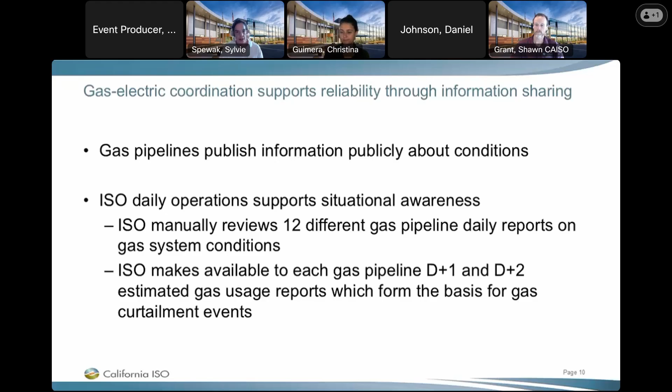Market participant expected behavior in response to physical limitations. Under normal conditions, resources are expected to notify the ISO of fuel supply concerns by submitting an outage card to the extent that fuel is unavailable or a derate for insufficient fuel supply. For outages, the ISO's policy is that once these outages are made public by the gas company, generators are responsible for submitting the plant level limitation through the outage management system so that we can reflect that in the market.

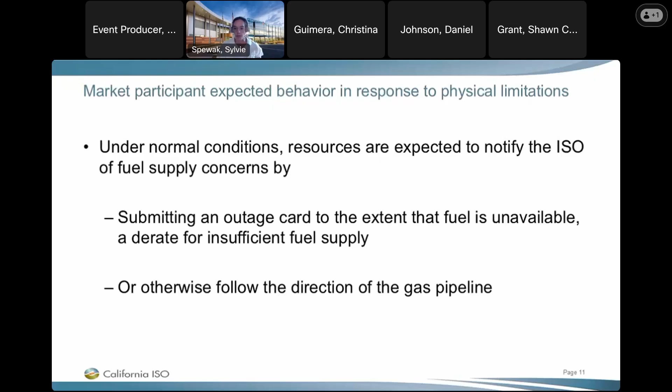There could be conditions that are not considered normal conditions, or as otherwise defined by the gas pipeline, where we might follow procedure at the direction of the gas pipeline. Gas-electric coordination is also integral to establishing capabilities necessary to maintain reliability. So this might be under conditions not considered normal conditions. What actions are appropriate in reliability events may be a function of coordination and defined procedure between relevant entities like the gas pipeline, the BA, the reliability coordinator, and the ISO.

So this group of entities might come up with a procedure to define physical gas limitations like service disruptions or curtailments due to reduced gas pressure, pipeline breaks, loss of equipment, or natural disasters. And depending on the circumstances, the ISO may follow a response plan defined in the operating procedure. And I wanted to point this out because we've heard a lot of stakeholder feedback around defining rules to provide more flexibility during operating emergencies like cold weather conditions or extreme weather conditions. So I wanted to point out that we have gas-electric coordination efforts that are intended to define procedure in those conditions.

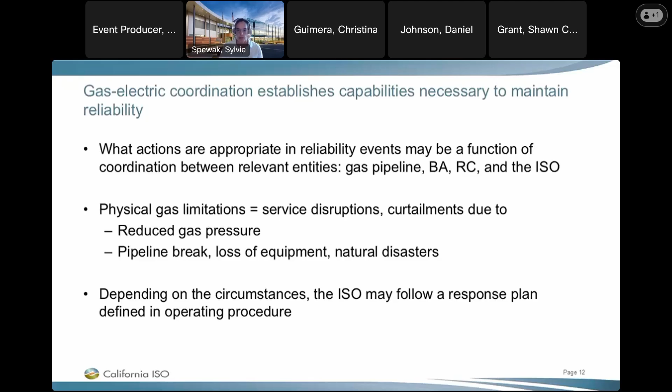All right, expected behavior in response to gas pipeline instructions for managing gas system imbalances. We understand that limitations on imbalances do not necessarily indicate that there's a physical limit on available fuel supply. In fact, not all OFOs are made equal is something that I've heard. They may mean different things for different pipelines.

But the basic definition here is that imbalances might arise when scheduled nominations differ from actual gas usage. So our expected behavior in OFO conditions might depend on when the notification is issued, either day ahead during the next day gas day versus the same day gas cycles, or depending on a resource's specific situation: how far their imbalances are outside of their existing nominations, what their balancing agreements with the pipeline might look like, or access to alternative fuel sources.

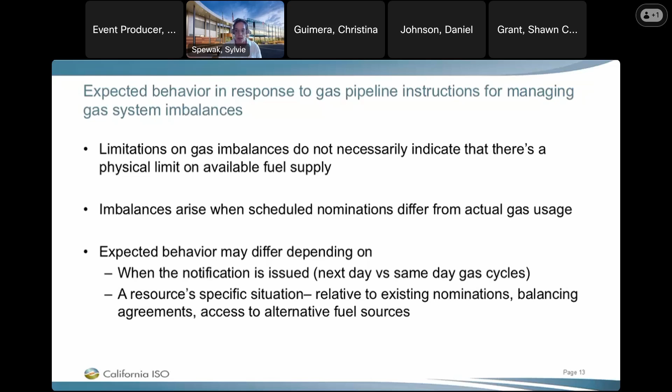And importantly, expected behavior may differ across regional pipelines, and ISO policy is to give deference to those pipeline instructions. So different pipelines have their own policies and practices that can differ in terms of timing and frequency of notifications, degree of limitations being imposed, penalty structure, and expected behavior as a result. All of which is to say, it's not a straightforward effort to define a single rule or set of rules for market participants to manage imbalances that would apply equally and appropriately across the market.

I do want to point out, though, that this doesn't mean we can't do this. Other markets do have unique rules for pipeline practices and exceptional circumstances. It just means that if we want to develop and implement rules that diverge from the standard practices that we're talking about today, doing so may require explicit authorization from the pipeline, and at the very least would start in the gas-electric coordination space. And of course, any new rules that we come up with would have to be vetted through the stakeholder process.

So in the next couple of slides, I'll talk about what the ISO's expectations of market participants are during OFO conditions, and how to reflect that in reference levels. This is based on the ISO's experience with gas pipelines serving the CAISO BA. In other words, based on our understanding of gas pipeline rules and expectations for the CAISO BA. But again, if gas pipeline rules and expectations differ elsewhere, there are opportunities to talk about how we might accommodate that. But starting off with just a benchmark of our expectations today.

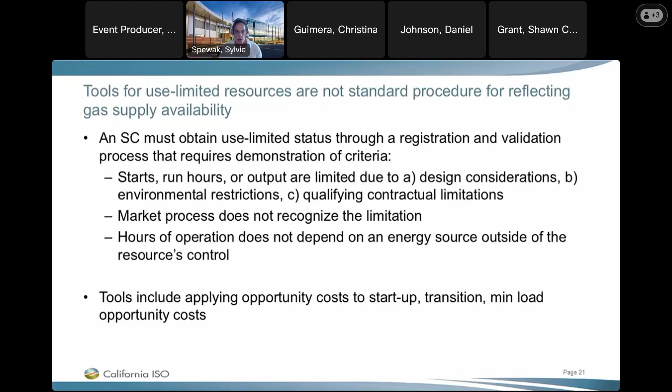Okay. All right. Gotten to the end of this section.

We also understand that as a concept, a gas nomogram would have broad appeal because it is a grouped constraint that can be designed to optimally allocate gas usage across impacted resources. The ISO's gas nomogram constraint is one of the tools available to ISO operators to reflect anticipated gas system limitations. And it is valuable and applicable, but under a precisely defined set of conditions to avoid a reliability event. And so in the next section, we're going to talk about this.

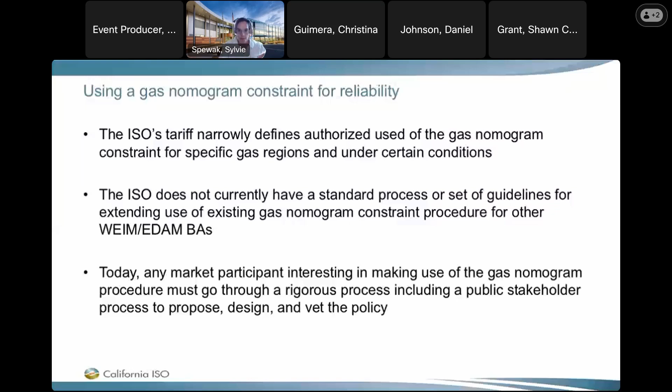So as the market operator, we want to make sure that all of our tools can be leveraged where applicable and valuable. So the ISO does support creating a streamlined process to allow EIM and EDAM BAs to make use of the existing procedure. FERC did previously reject the ISO's proposal to expand the use of a nomogram to the EIM.

In doing so, they didn't exactly specify the precise procedural expectations for the one right or successful policy for a gas constraint nomogram. They did approve the procedure that we have for SoCalGas and SDG&E and posed a number of questions around the process for developing and informing a constraint in a different way. But because we have an approved design, that means that we are confident that the way we do it today is consistent with regulatory precedent.

The way we do it today might not be the only right answer, but doing it differently is going to require answering a bunch of questions through the stakeholder process. So in this part of the workshop, we'll be doing two things.

First, deep dive on the existing guidelines and operating procedure that the ISO uses to implement the FERC-approved rule around the gas nomogram. One of the things that we did not do last time around when going to FERC to request an extended use of this was establish specific guidelines and specific operating procedures up front for regional BAs. Now, there are reasons to this, but this time around, we do plan to support this proposal with a set of guidelines that align with existing procedure.

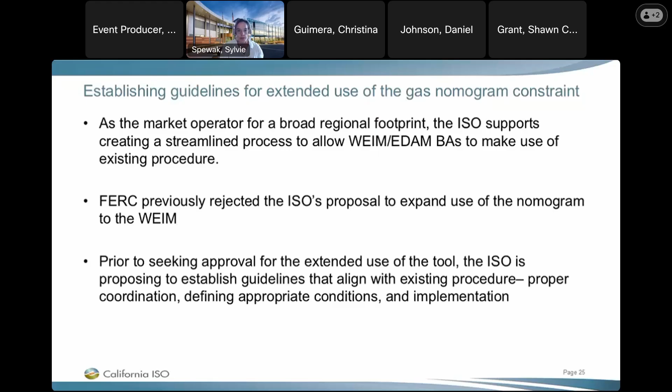And the other thing we're going to do is try to answer some of those regulatory questions that I mentioned to set the stage for thinking about other ways to go about using a gas constraint nomogram for those that are interested in doing so. So first, we'll talk about how this works today. This is a high-level overview of how the ISO implemented the gas nomogram for SoCalGas and SDG&E.

Point number one that is very important is that the gas company is the entity that makes all the calls. The ISO maintains a nomogram for a zone that is specified by the gas pipeline under conditions that are specified by the gas pipeline, and the constraint itself is defined and informed by the gas pipeline. The ISO activates a constraint to avoid triggering a reliability event that might otherwise require manual gas curtailments to ensure gas system reliability and would otherwise require manual dispatch by the ISO market operator to ensure electric system reliability.

So the nomogram exists in scenarios when we can't necessarily rely on standard practice. In other words, where market participants managing constraints themselves may not be sufficient. And also to avoid excessive impacts to the gas system under constrained conditions when bids in the electric market can't completely ensure reliability. So in these conditions, a nomogram could be incrementally better than manual dispatch and curtailment. It's not the only tool, but insofar as the gas pipeline recognizes that or identifies this as operating procedure, then the ISO supports designing and implementing the nomogram.

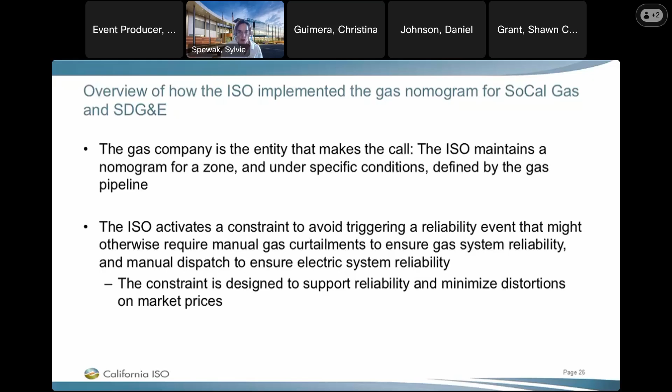Yeah, so here I'll talk about how, if a situation arises that requires a gas nomogram, it's going to be collaboration between the market entity, the gas pipeline company, and/or the ISO. From there, the gas pipeline company will engage the ISO so that all three parties work together on putting this together. The real goal here is to define the specific need for the operating procedures that's different from what we've expected under normal conditions. So here it's really the market entity talking to the pipeline, and the ISO talking to everybody. So everybody coming onto the same page to figure out why this is a need.

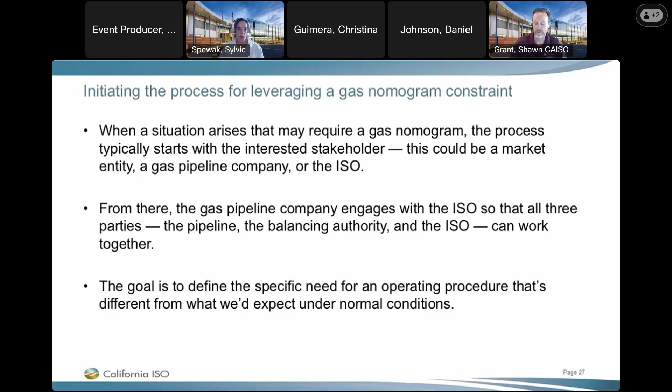Next slide, please. But we also have to remember that the gas company is the one that defines what qualifies as a gas system reliability event, and they have to do that within their tariff. The gas nomogram comes into play when a gas system reliability issue can't be managed by other standard actions. So, as Sylvie said earlier, the gas company is the one that's running this or setting this off if it's needed. And they have to define what events are going to be applicable to the use of the nomogram.

We have to know that the limit in a nomogram must be clearly defined in the constraint. Once the nomogram is activated in the electric market, it impacts all generators on the affected pipeline for the duration of the event. So once the gas company has said, hey, ISO, can you please activate this nomogram? They've already set and defined what's within that nomogram, those units that are going to be impacted, and those units will be under that constraint until the nomogram has ended. And the gas company will be setting those parameters on the time duration, the dates and times. So that's kind of a high level.

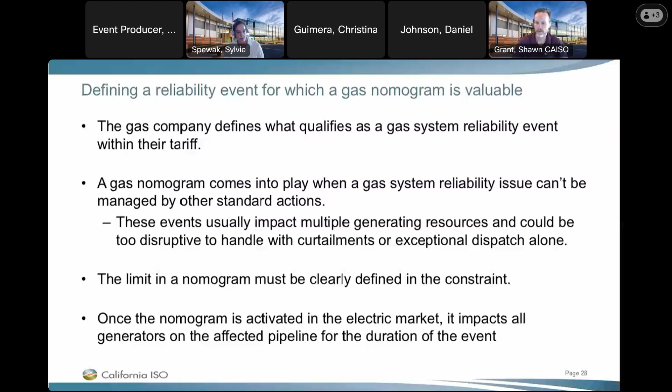I think that's all, unless I have another slide there, Sylvie. And if anybody else has any other questions. Oh, yeah, sorry. That's right, 4120. All right. But no, operating procedure 4120, I'm sure everybody's read it. I'm just joking.

But it basically lays out all the roles and responsibilities that each entity has. But the number one step is, again, the gas company is the one that is initiating the call when this procedure does get put into place. They're setting out the parameters. They're letting us know exactly what the limitations are, how long they're going to be, what zone it's going to be, right? So they lay out the whole communication plan, and then internally we have our steps that we need to do. That's really all of 4120 rolled up nice and neat for everybody.

But we also currently have NDAs with Kern River, PG&E Gas, and SoCal Gas so that we can talk back and forth. And FERC Order 787 also allows us to talk back and forth, but we do have an NDA with each of those entities as well.

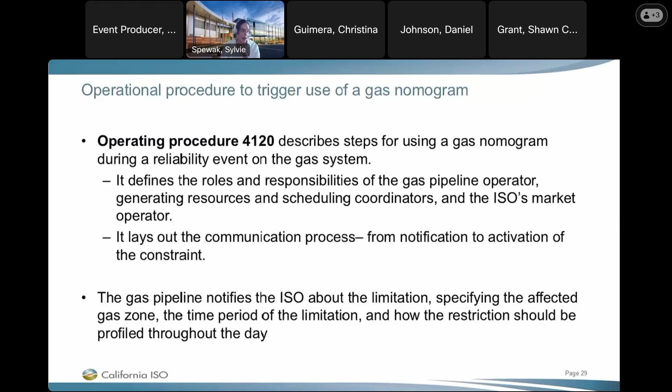So Sean just walked you through getting all of the proper entities to the table to come up with the need for a nomogram constraint. Next, I'll talk about what the ISO does. So the ISO will set up a constraint for a zone that's specified by the gas pipeline that limits the market optimization to dispatching no more than a specified amount of gas that is specified by the gas pipeline. The zone to resource mapping ensures that the gas constraint is appropriately applied to the resources that are impacted by the limitation. And again, this is something that is defined by the gas pipeline, and it could be a subset of resources or a broad regional area.

The ISO will enforce a nomogram, ideally in 3 market runs: day ahead, real-time pre-dispatch, and RTD. If the ISO does not get the limitation in time from the gas pipeline before the day-ahead market runs, it may not be feasible to enforce in the day-ahead market.

Now I'm going to talk a little bit about the formulation of the gas nomogram constraint that the ISO has used to date. I do want to point out that there may be other ways technically to inform what a gas nomogram constraint looks like in market design. At the end of the day, we will formulate a gas nomogram constraint in a way that satisfies the reliability concerns of the gas pipeline. So the gas pipeline is the one that's really dictating and determining what this design looks like. This is what we've used to date.

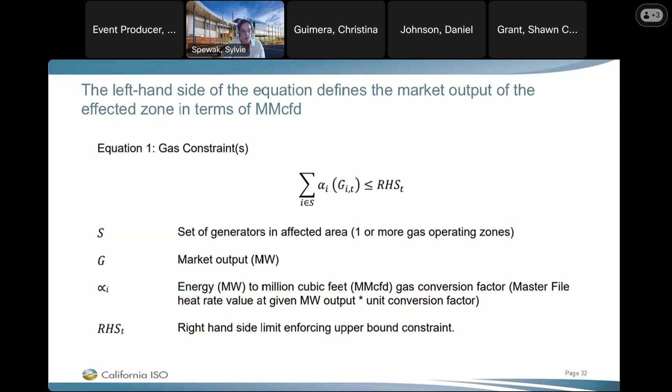The right-hand side, this is the gas capacity reduction limit. So you've got the amount of generation, expressed in MMCF per day, that the ISO determines is necessary to manage the gas system limitation and operate the electric system reliably. And then we have this allowance distribution coefficient. I think of this just as a shaping factor.

So if we get an hourly limit from the gas company, we can apply that directly. If it's a daily limit, we'll want to shape that throughout the day to use the limited gas efficiently. So we might do that by shaping it based on a ratio of net load forecast to daily net load forecast. We might also use the last available D2 gas burn as a reference. Again, there's different ways to do this, but this is what we have used in the past.

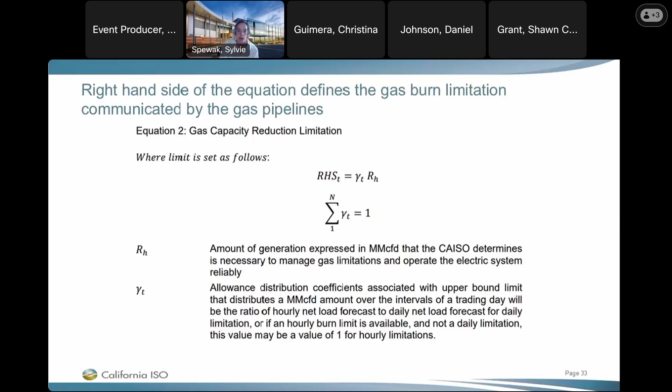Now the impact of this. When the constraint is applied in the market, it is enforced and binding. It lowers resource-specific LMPs in the gas-constrained area so that there's an economic signal to ensure gas usage is appropriately managed. And I just want to point out that this is a distinct approach from what we've been hearing from some stakeholders, where a resource might increase its energy offer in order to avoid being dispatched. This lowers LMPs in the area to prevent resources, as their energy offer is, from being dispatched, and it'll force the optimization to find supply from somewhere else. I do want to note that gas constraint nomograms will be active during the EDAM RSE.

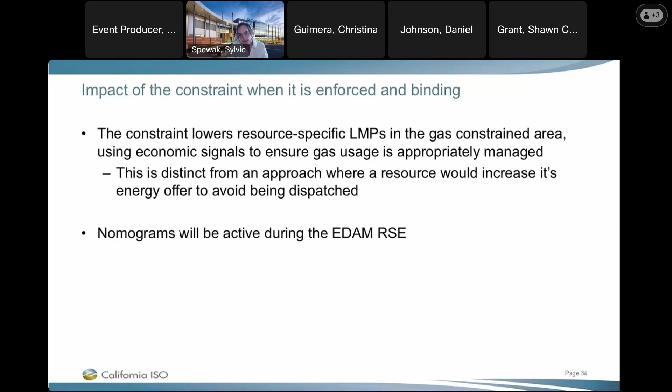The purpose of formulating it this way is to support gas system reliability while also limiting distortions to market outcomes in the electricity market. When active and binding, the shadow price of the constraint will be reflected in the congestion component of LMPs of only the affected resources. Or more technically, what you'll read in our documents is that at nodes used to dispatch associated generators with a shift factor of 1. So that is where the price signal shows up. The shadow price will not be reflected in the marginal cost of congestion for LMPs for cleared demand. In other words, it will be applied with a shift factor of 0 to all other pricing nodes that are used to settle demand.

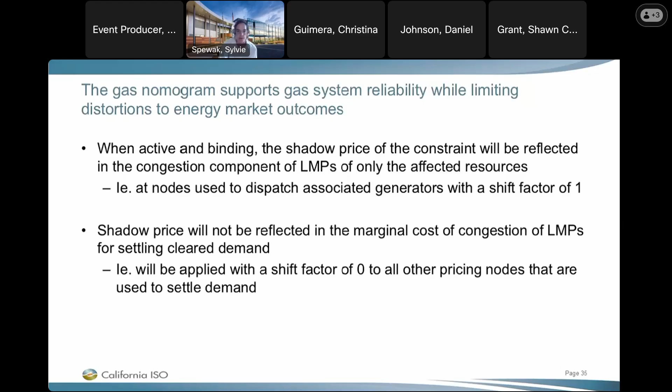So that was all of the technical aspects of how we formulate this and how we do this at the deference of the gas pipeline company. Finally, I do want to discuss the fact that the use of the gas nomogram has some practical considerations. For example, setting up the constraint is a manual process that requires a lot of coordinated communication. I also mentioned that the heat rate we use is a single average heat rate that we pulled from the master file, which makes it somewhat less precise than if we used the full heat rate curve. But we do that to simplify the equation, which is already computationally intensive.

Nomograms in general are computationally intensive to run within the optimization, and this is why the ISO monitors and manages the volume of active nomogram constraints to make sure we have robust market performance while supporting system reliability. And all of this is to say that in practice, there are a lot of complexities and considerations around the use of a gas nomogram for reliability, and it is just one of many tools the ISO uses to maintain reliability. Back to Michelle's point, it may not be the right or the applicable tool in some situations. It is important in some situations.

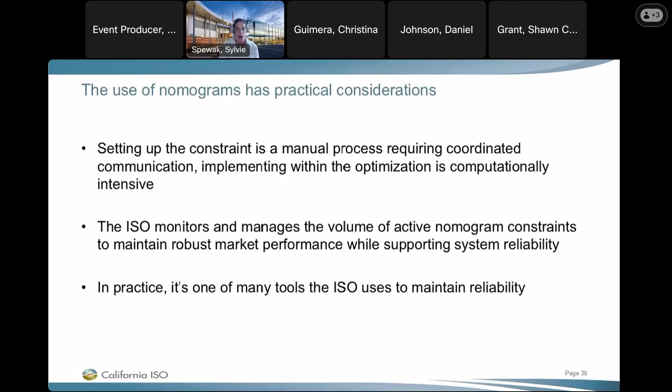And to illustrate that, I'm wondering if Miheer or Abhishek are available to talk to us about when we've used this in the past. Yeah, it's me here. I can talk to it. Thanks, Sylvie. Okay. Yeah, I wanted to share some of the data that shows when the nomogram was activated, and then there's also going to be some data on when it actually bound.

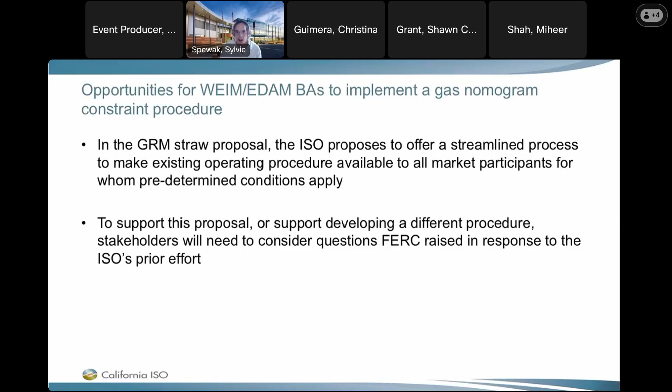Insofar as stakeholders are interested in developing a different procedure, stakeholders will have to consider questions that FERC raised in response to the ISO's prior effort. And to open the door to that discussion, I have Andrew Ulmer from our legal department here to talk about some of those questions. Andrew?

Hi, Sylvie. Good morning, everyone. Hopefully you can hear me. Yes, we can.

Great. Okay, I've just got two or three slides to walk through, and I think Sylvie framed this accurately, which is that we have some lessons learned from efforts to expand the use of a gas nomogram, which we proposed to do back in 2017, both within the entire ISO BA, as opposed to just in connection with the SoCalGas and SDG&E systems, but also into the WEIM area as well, and provide a means for BAs operating in those areas, EIM entities, to inform the market of gas constraints that impact the dispatch of generating resources.

So we made that proposal in 2017 in conjunction with a number of other proposals seeking to make some of the mitigation measures we had in place on an interim basis more permanent, and those mitigation measures associated with the constraints associated with the Aliso Canyon gas facility.

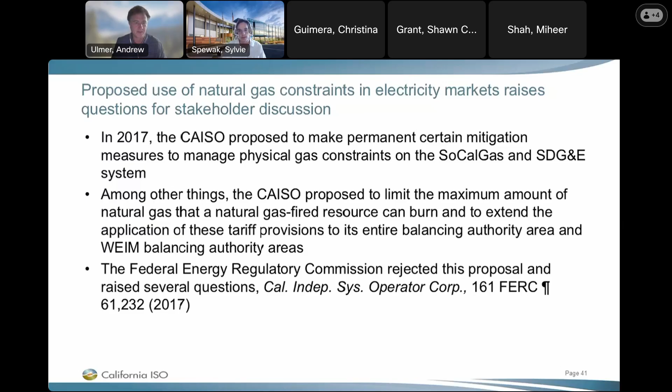So I see folks on the call who probably lived through this as well, and you'll recall that the Federal Energy Regulatory Commission rejected sort of the suite of permanent measures and also raised a number of questions. I included a brief citation to the order here, so it should be very easy for folks to pull up and look at it. I think the questions are included toward the end of the order, starting around, I think, paragraph 55. So for reference, folks can take a look at that.

But generally, the questions fell into several categories, and one was seeking to understand whether, if balancing authorities in the WEIM had the ability to develop and enforce a gas constraint, that would have some kind of undue influence on market operations, understanding that the BA function those entities performed was simply one function. They also might be generator owners, transmission operators, and the commission asked a number of questions about whether employees with a marketing function for WEIM entities, and if we think about it now in the context of EDAM, I guess the same question would be in play, would somehow have access to non-public information about transmission system operations?

And if they would, how would they? It's an interesting question. I'm not sure I have an answer to it, but it's one that I think we would want to overlay on any effort to extend the use of a gas constraint nomogram. And to the extent the question here applies to WEIM or EDAM entities, it would not seem to apply to the ISO and its role as a BA, given that in this space the ISO is solely a market operator and doesn't own facilities.

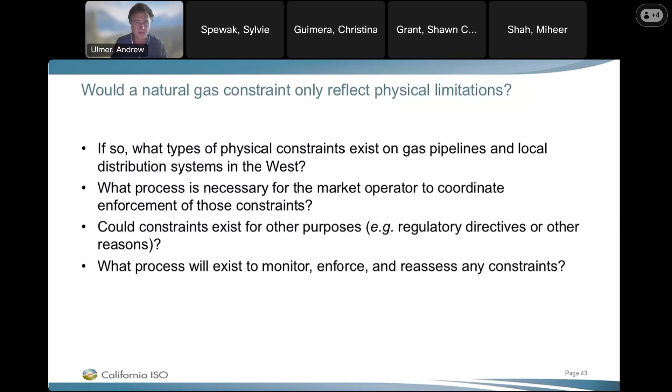And then how do we monitor that constraint? How do we revisit it? These are questions about whether it's a constraint forevermore, or does it evolve based on system conditions, new infrastructure, et cetera. So there are a series of questions I think we have to reflect on as we embark on any effort to extend a gas nomogram constraint. And then I think there was maybe just one other slide.

This was a question that related, I think, to the WEIM area, given that some resources in the WEIM area are participating in the market and some are not. So if we were to apply a market constraint to those that are participating, would that ultimately solve the problem for the gas pipeline or the local distribution company? It might not, but I think that was the question: is this really going to be effective if you're only applying it to a subset of resources drawing on the gas pipeline?

But a question is, maybe if we had deeper coordination between the market operator, the gas pipeline and the LDC, would that address this question, in the sense that the gas pipeline would understand more of the inputs into those resources not participating in the market versus those that were? This question might be less relevant in the context of EDAM, when you have all resources in, as opposed to participating and non-participating resources.

And then I think Sylvie mentioned this, that our expectation is that the gas constraint would be enforced in an RSE situation, but some of the questions that did come out of that FERC order did involve questions about how would that work, and would it avoid the risk of other manual interventions?